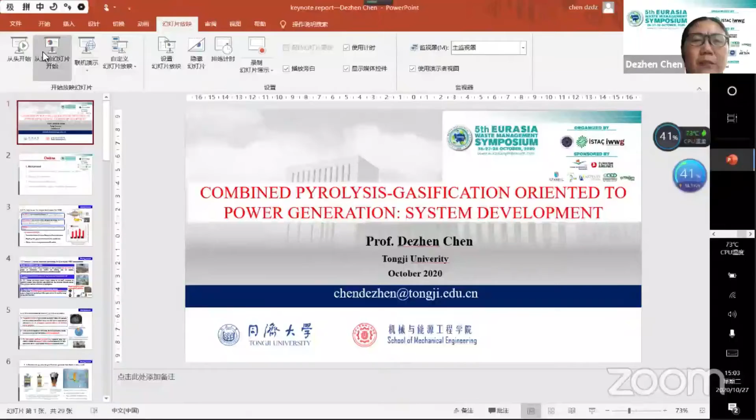My presentation is on combined pyrolysis gasification oriented to power generation system development. I will talk about this from 5 aspects. First, let me give the introduction of the background.

Pyrolysis is an important route for waste-to-energy. Landfill is not a sustainable disposal method. All of China will ban municipal solid waste landfill from 2023. Incineration is a major and widely adopted technology, but with a complicated pollution control system, relatively low power generation efficiency, and high operation cost.

The pyrolysis process works like this: the waste will be heated to a certain temperature without air supply, so the waste will be decomposed into volatile matter and char. When the volatile matter condenses, the pyrolysis oil and gas can be recycled.

It has advantages like this: it has a similar sterilization and volume reduction effect to incineration, and it can also recycle char, gas, and oil instead of only sensible heat like incineration. It is cleaner when the 3 products are safely utilized.

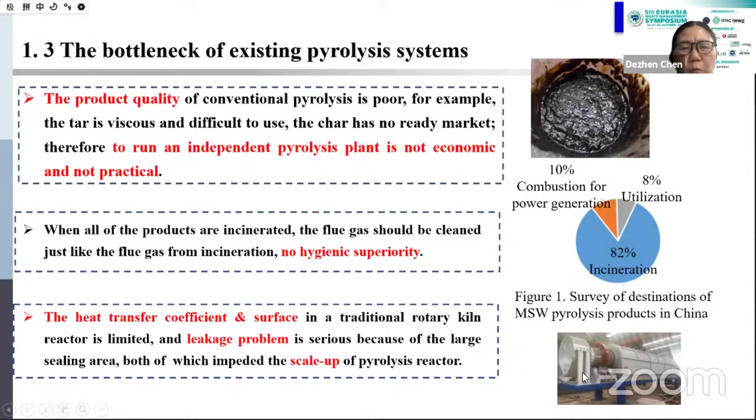We surveyed municipal solid waste pyrolysis plants in China, and found that 82% of the products are just incinerated. When all of the products are incinerated, the flue gas should be cleaned just like flue gas from an incineration plant, so it has no hygienic superiority. Also, for the very common reactor like this rotary kiln, the heat transfer coefficient and heat transfer surface are very limited, and it also has leakage problems. Therefore, scale-up is very difficult.

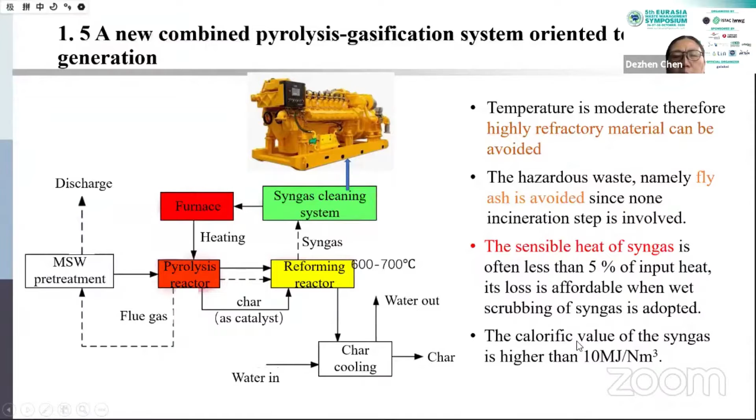We developed the whole system, including this pyrolysis reactor and the reforming reactor, and also the syngas cleaning system, to run more efficiently. We will talk about these three.

First, we want to talk about the pyrolysis volatile reforming mechanism and its effect. For a normal pyrolysis reactor, the volatile will be evaporated from the solid waste, and the volatile will never contact the solid again. But we can force the volatile to contact the hot char again, and then the oil in the volatile will be converted into gas.

So when the temperature increases, the syngas yield increases, and correspondingly the liquid yield decreases. At the same time, the viscous pyrolysis oil with very dispersed components can be converted into refined oil with very low viscosity.

It's more important that we found that in this process, around 80% of the water vapor in the volatile participates in this oil decomposition reaction, and the water vapor is converted into syngas. Therefore, the latent heat of the water vapor is recovered.

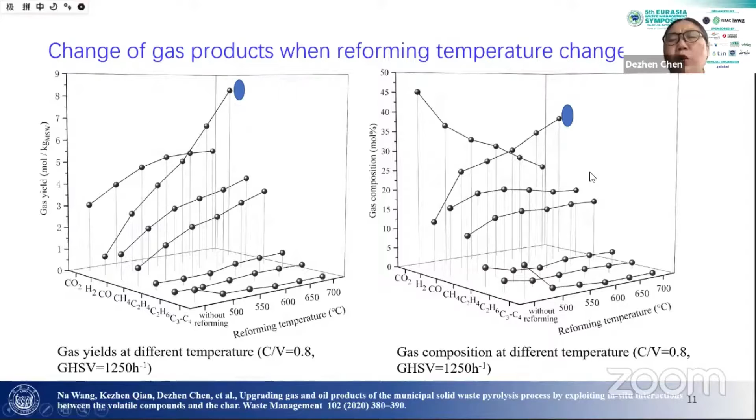Then we talk about reactor development. We must note that pyrolysis is an endothermic process.

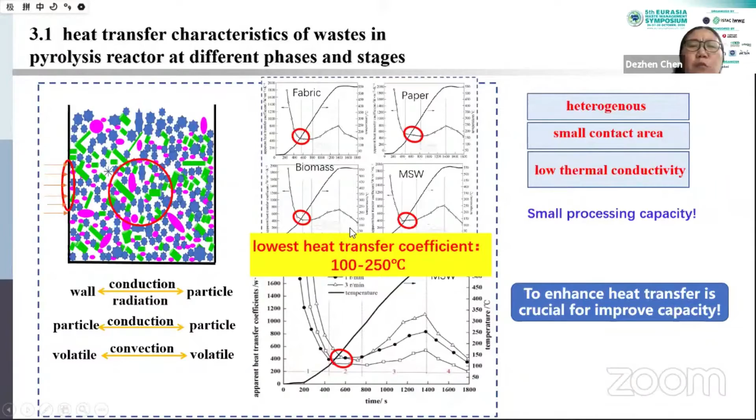Here are the heat transfer coefficient changes inside a rotary reactor for different kinds of waste components. We can say there is a lowest heat transfer coefficient area for all of the waste, within this temperature range. This is just after drying and before the pyrolysis reaction takes place. So actually, it's very difficult to enhance heat transfer in this area for the conventional reactor.

To improve this, we developed a new concept for reactor design. We divided the reactor into two stages. For the first stage, we use this stage to homogenize the heterogeneous waste into uniform particles. In this first stage, we will use combined direct heating and indirect heating together, and then raise the heat transfer coefficient.

But if we consider the breaking force of the paper and the cotton, we find around this temperature, the mechanical strength, namely the breaking force for cotton or paper, decreases to zero. So if we raise the temperature of the waste to this range, all of this material can be easily converted into uniform particles.

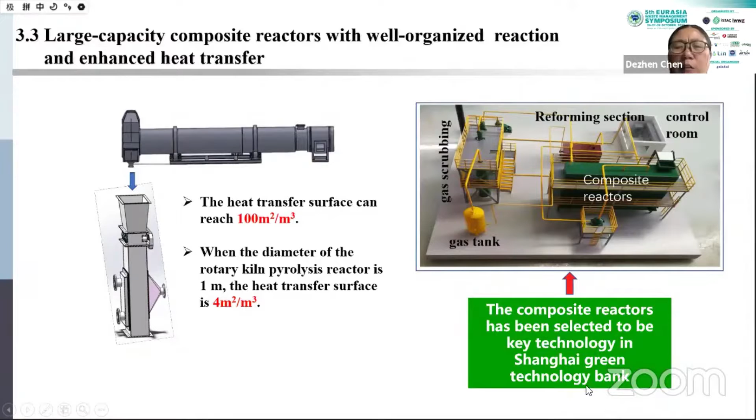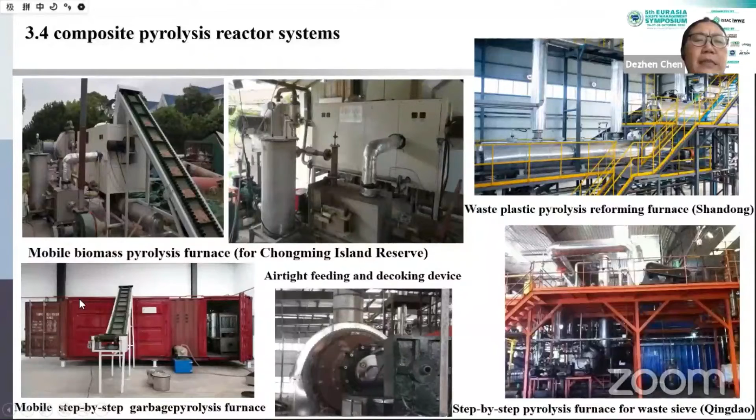We also have developed many reforming reactors for different kinds of materials. These are some examples of the composite pyrolysis reactor systems we have developed. These are movable reactors, and these are big ones. We have a very small, fast moving one for this. This is our pilot testing system, and after this is the composite reactor. It's very small but has a big capacity.

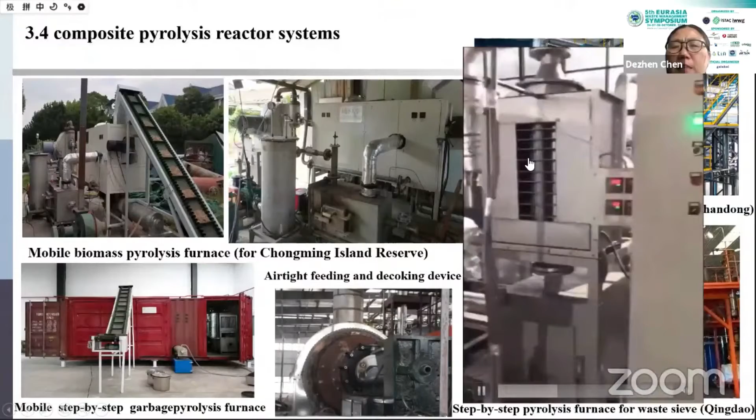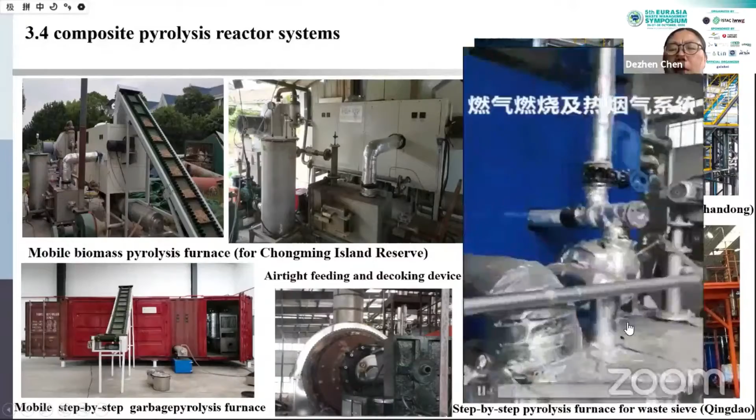Then we have the cyclone for the Syngas scrubbing system. This is the Syngas scrubber, this is the PLC control system, and this is the tower. Also, we have a DCS system. This is the condenser to separate oil and gas, and this is the gas tank. This is the furnace for the Syngas to supply heat for the whole system. You can see the gas burning here. All the gas is produced for our own system.

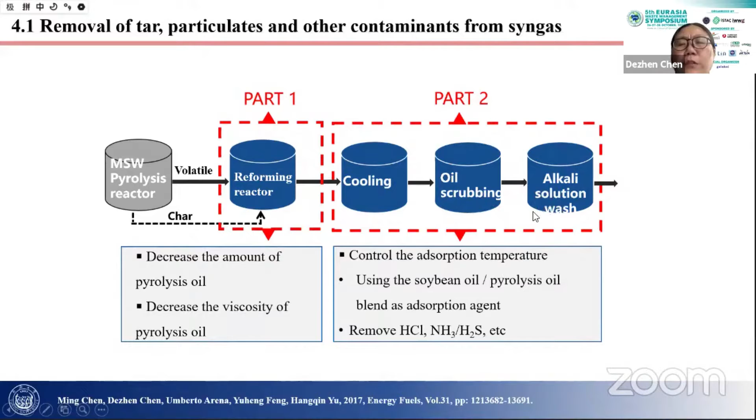Now we talk about Syngas purification. We have developed a system like this for removal of tar, particulates, and other contaminants from the Syngas. It includes a cooling system, which includes the condenser and a water cooling recycling system, the oil scrubber, and the alkaline solution washing tower.

We also tried to use the pyrolysis oil from our own system to replace the soybean oil. We compared this reformed pyrolysis oil with the soybean oil, and we found that when the absorption temperature increased, the absorption efficiency decreased obviously, but the soybean oil changed very little. So the reformed pyrolysis oil is not as good as soybean oil.

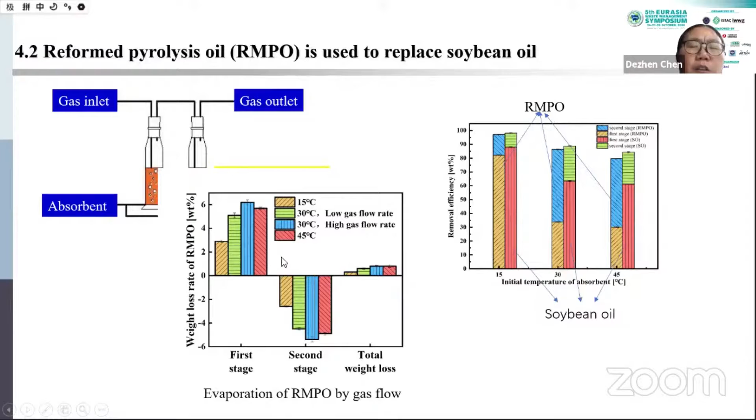We also checked the reason, and we found that the reformed oil is very easily carried by the Syngas. Here are weight loss rates to represent how much reformed oil can be carried by the flue gas. The higher the value, the more oil is carried by the gas, by the Syngas. You can see higher temperature and higher flow rate will take more oil from the absorber.

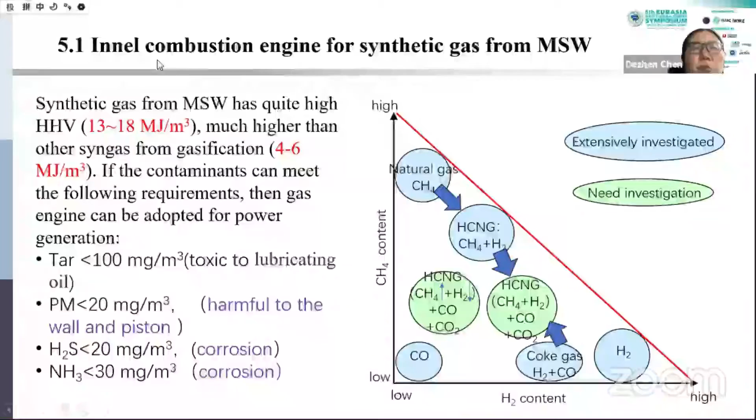Some investigations show that for the internal combustion gas engine, maybe we must change the spark plug area. For example, we may need a pre-combustion room here with some easily flammable gas, for example, hydrogen. But this investigation is still ongoing. We need much effort for this.

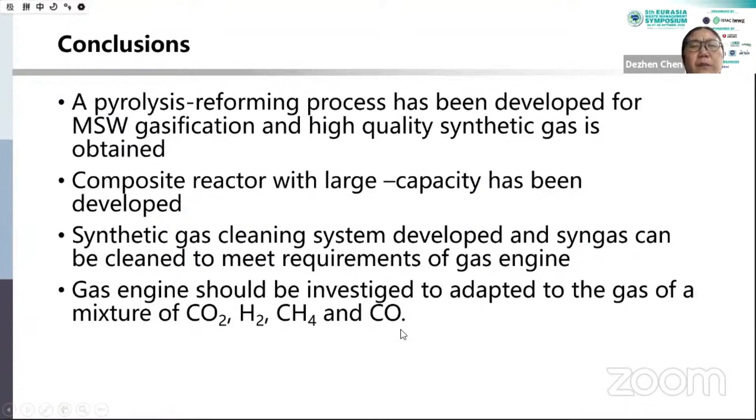So the conclusion: we have developed a pyrolysis reforming process for municipal solid waste gasification, and high quality syngas is obtained. We have also developed a composite reactor with large capacity, and a syngas cleaning system, and the syngas can be cleaned to meet the requirements for a gas engine. And the gas engine should be investigated to adapt to a gas mixture of carbon dioxide, hydrogen, methane, and carbon monoxide. So thank you, and your questions are welcome.

So any question for me? I wonder if the voice is okay. So any question? Okay, if no question, we will move to the next speaker.

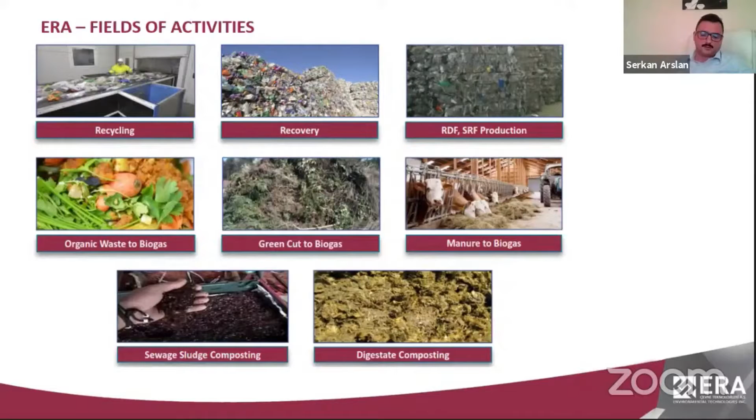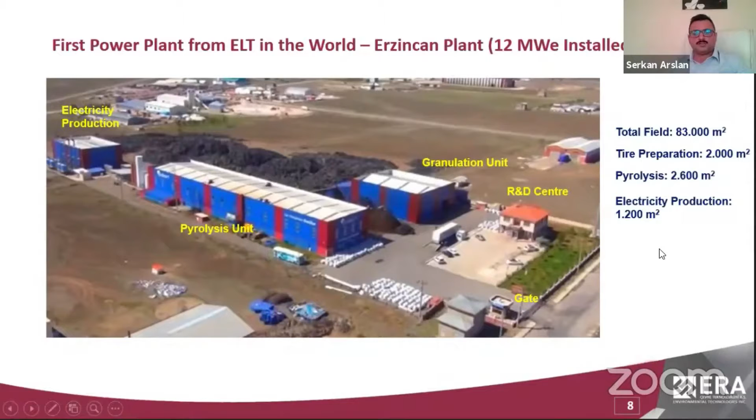You see here the total field is 83,000 square meters. The tire preparation and granulation unit is 2,000 square meters. The pyrolysis unit is 2,600 square meters, and the electricity production area is 1,200 square meters.

We established our official R&D center on 9th April 2019. It is the only R&D center in the field of chemistry in Erzincan. We have closed a TÜBİTAK research and development project successfully. One TÜBİTAK 1501 project is already continuing. And we also have 5 internal projects. We have 10 national publications, 1 now submitted, and 3 published international publications. 3 university cooperations, 1 industry cooperation. A pyrolytic oil and carbon black laboratory. And we have an innovative project, Teknohamle, with a 10 million Turkish lira R&D budget. It is about supercritical water oxidation.

So if we summarize our innovation potential: the first medical waste sterilization plant in Turkey, the first electricity production plant from end-of-life tires in the world, a fully integrated waste management plant, a self-designed continuous tire pyrolysis reactor and line, and the only R&D center in the field of chemistry in Erzincan.

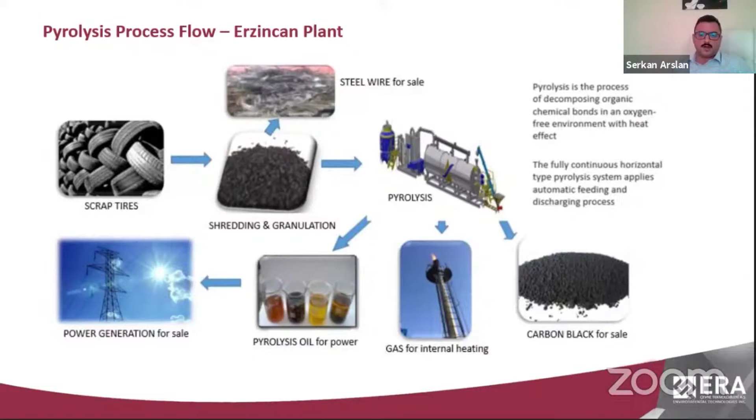Then after the cleaning processes of pyrolysis oil, we send it to the generator for electricity production. The water content of the oil is very, very important. If the water content is over 1000 ppm, we can have some problems with the generator parts. Then we also have carbon black, the char of the pyrolysis process, and this carbon black is sold to rubber and tire producers as binding material.

So I can pass this slide fast because I have already talked about it. You see here some pictures from our plant. Here are the steel wires that we remove from the ELTs.

Sorry, please mind the time. Sorry. Yeah, 2 minutes. Sorry, I didn't understand. Again, please. I mean, only 1 minute. Well, okay. Yeah. Okay.

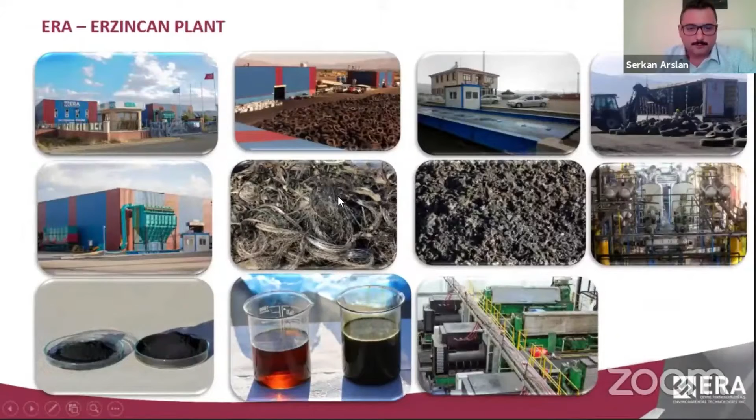Then products and application fields. From the granulate we can achieve 43 to 47% pyrolysis oil, which produces electricity by fuel oil generators. And we have syngas that we cannot condense to pyrolysis oil, that we use to heat the reactor again. We have carbon black, and also, as I said, we have syngas.

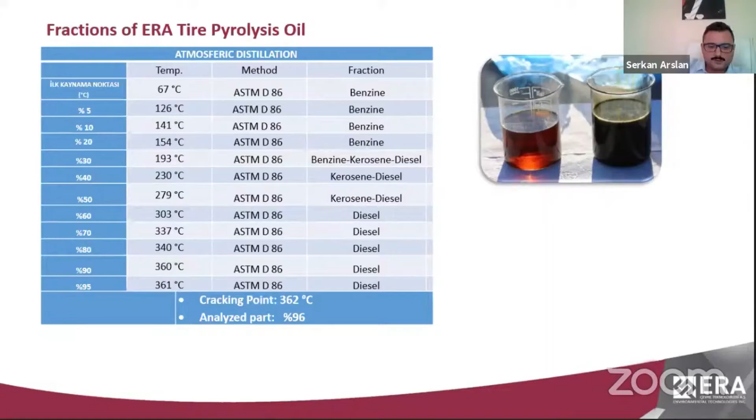The carbon black is one of the most important outputs of the plant. We get it as powder, and we make it smaller to get a smaller particle size distribution, and we sell it to the tire industry, conveyor belt making, rubber industry, paint industry, auto parts industry, and bitumen addition. And we also have a patent application for an earthing resistance reducer.

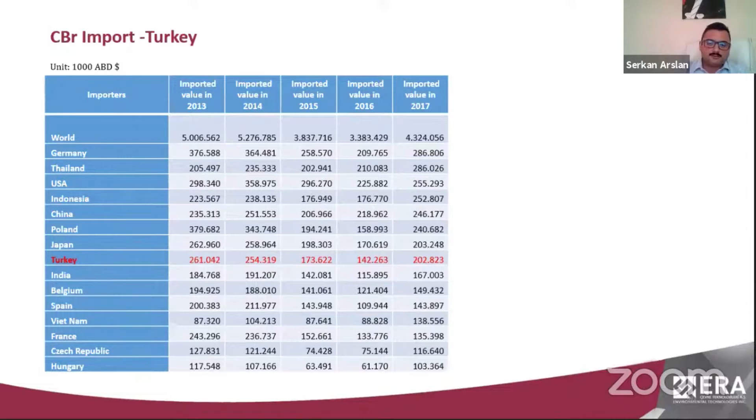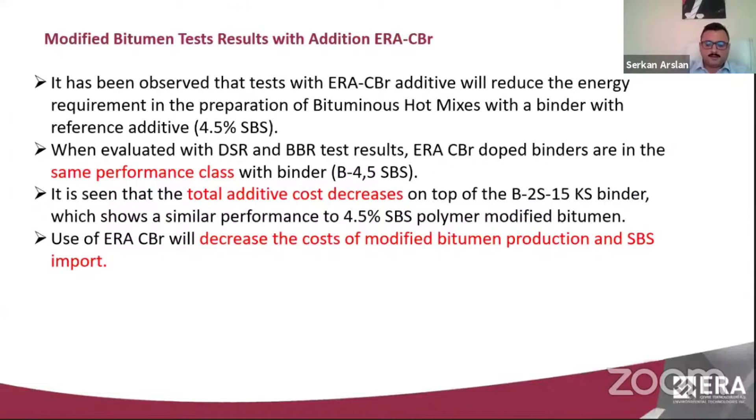So we have another research study. We tried our CBR carbon black in modified bitumen production, and we see that ERA CBR can be used as a modification additive for bitumen, and that will decrease the cost of modified bitumen production and the SBS import, which is used in bitumen production.

which has the value of nearly 5 million euro per year, and carbon black is 152,000 tons, and the value is almost 45 million euro per year, and the electricity production capacity is 800,000 megawatt hours per year.

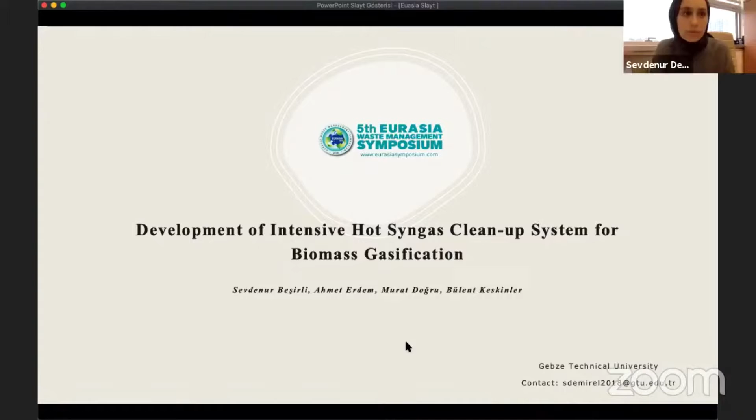No movement. Now, wait a minute. Oh yeah. You can see? Yes. Okay.

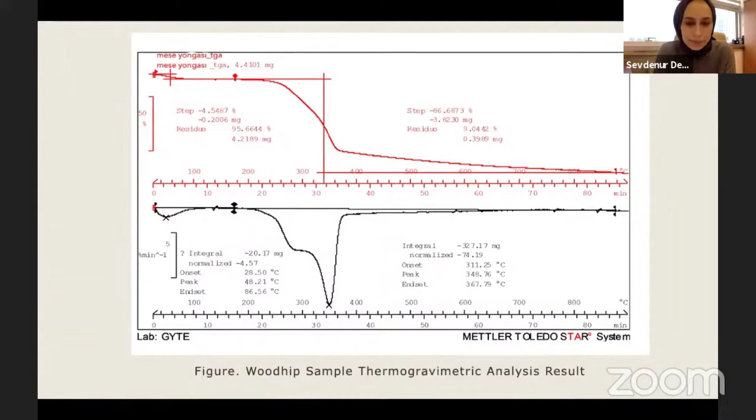In addition, a thermocouple and a control panel are connected to the system to control the temperature level of the resistance. This system was placed at the end of the reactor. Stainless steel filters were used to remove particulate matter, and nickel-based catalyst was preferred for tar removal.

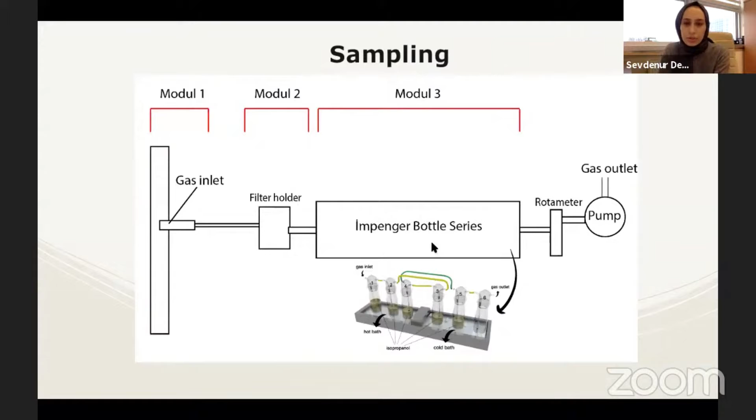To determine the pollutant load of the gasifier reactor, firstly module 1, module 2, and module 3 were all placed in series one after the other as shown in the figure. As a second step, an integrated filter system was implemented between module 1 and module 2 in order to investigate the effect and efficiency of the stainless steel filter and catalyst in syngas cleaning. Rotameter and pump are placed at the end of the impinger bottles for the adjustment and control of the gas flow rate.

The reactor was operated with a feed rate of 100 kg per hour. Sampling was started after syngas was produced, and sampling time was nearly half an hour. A fuel filter was placed in the filter holder shown in figure 2, this place. And then the filter was extracted with isopropanol by Soxhlet extraction in the laboratory. Thus particulate matter and tar were separated, and the amount of particulate matter in the gas was calculated.

And then a 100 milliliter sample was taken from the total tar sample in isopropanol from the impinger bottles, connection pipes, and Soxhlet extraction, and placed in a rotary evaporator. The amount of tar was calculated by separating isopropanol and tar from each other. In order to see the experiment steps in detail, you can check the tar protocol.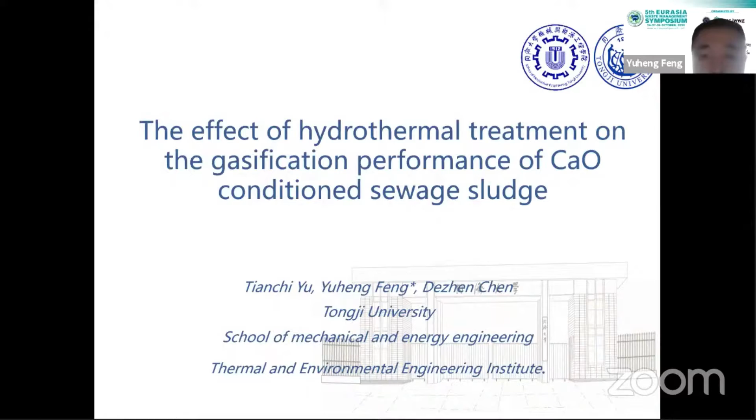First, I will talk about the background. With the faster development of China these days, the sewage output is increasing rapidly from 2011 to 2018, and the sewage treatment capacity has reached almost 60 million cubic meters per year. The sewage sludge, which is the solid production of the sewage treatment process, has also reached over 6 million tons per year, with a growth rate of 10% every year.

For sludge treatment in China these days, we use landfill, incineration, land use, and building materials. Among them, incineration is a very attractive disposal process in big cities, especially in eastern China, since it could eliminate the organic compounds in sewage sludge.

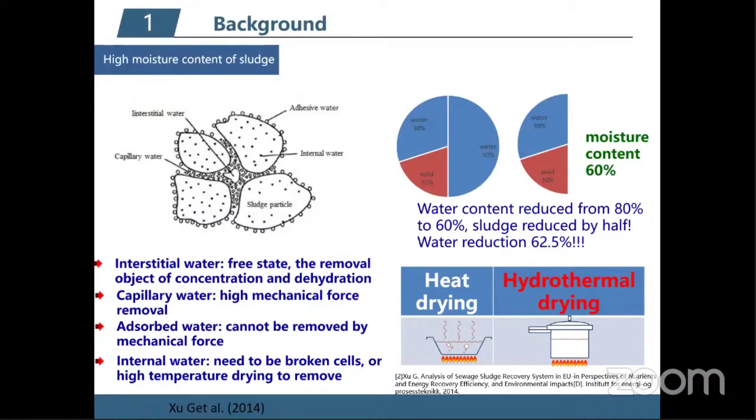For the incineration process, we often use the heat drying process, and its energy cost is very high. Sometimes we use the hydrothermal process in a closed reactor, raising the temperature so most of the water is in the liquid state. So the cells in the sludge could be destructed and energy could be saved.

After that, if we use the mechanical process, it is very easy for us to reduce the water content to around 60%. Also, the hydrothermal treatment has a promotion effect on the gasification process. In our previous study, we found that the tar content in the gaseous products will be reduced, and also the hydrogen content will be raised.

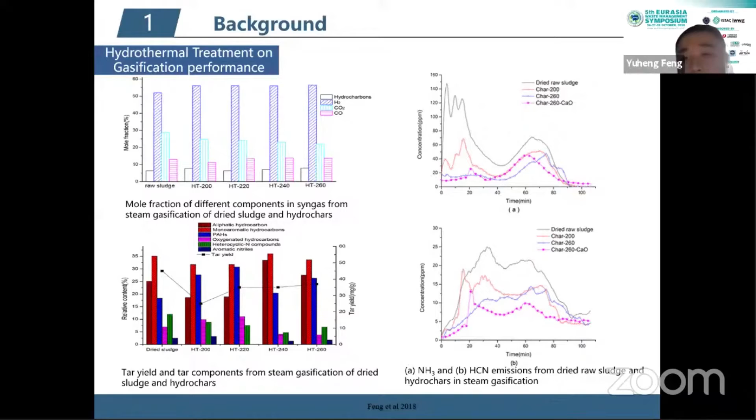Also, some of the pollutants, such as ammonia and hydrogen cyanide, could be reduced by the hydrothermal process.

Sometimes we use calcium oxide as a conditioner for the sewage sludge. First of all, it will reduce the water content since it's an inert material, and heat could be released from the addition of calcium oxide. It will also enhance the mechanical drying performance because it could reduce the viscosity of the sludge. Another reason is for sanitation, because it could kill bacteria and pathogens.

Also, for the gasification process, calcium oxide is a very good catalyst, and it has been proven in the gasification of biomass. So the motivation of this research is to examine the hydrothermal treatment on calcium conditioned sewage sludge.

This is the material from sewage sludge from a sewage treatment plant in Shanghai. It's after mechanical concentration and centrifugal dehydration. The moisture content is around 80%, and its higher heating value is 12.99 megajoules per kilogram.

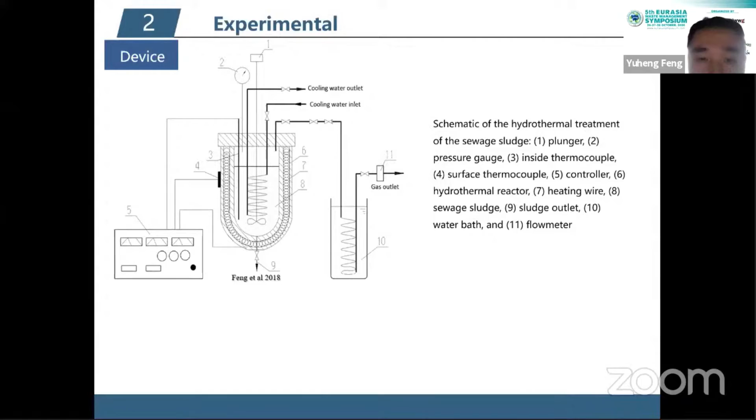This is the hydrothermal device here. We use two temperatures, 200 centigrade and 260 centigrade. The hydrothermal time is half an hour, and the calcium oxide addition is 10% dry base.

This is the gasification device. We used 5 materials: the raw sludge and the hydrochar of the conditioned sludge. We also added the calcium oxide in the dry state, so we named it DM here. And we also added the calcium oxide to the wet sludge, and then we dried it to remove the water, so it's named CS.

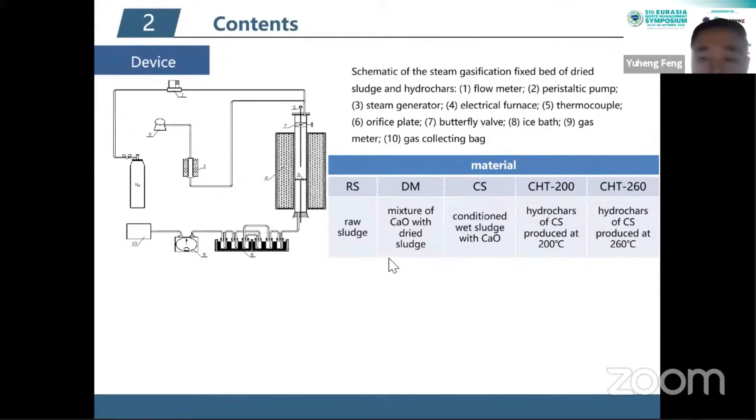And the mass ratio, just to improve the gasification process, to raise the hydrogen content and reduce the tar, we use steam as the agent. The steam to feedstock ratio is 2.4 to 1, and the temperature used here is 900 centigrade.

So these are the products from the hydrothermal process. From the industrial analysis and the element analysis, we could find that the volatiles will be reduced during the hydrothermal process, due to the heating of the material. Also, using the hydrothermal char without calcium oxide addition, we found that the fixed carbon of the hydrochar will be raised, due to the aromatization process during hydrothermal treatment.

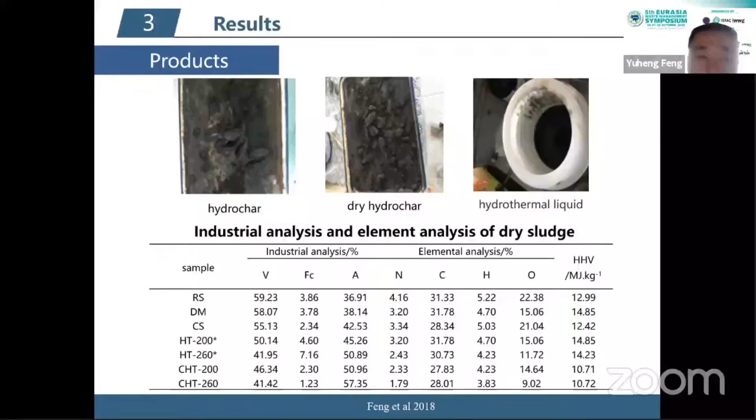But for the hydrochar with calcium oxide addition, we find that fixed carbon is reduced. This is because of test problems, since during the pyrolysis process, some carbon oxide and some steam released will react with the fixed carbons. Also, the heat values will be reduced after hydrothermal treatment, since the addition of calcium oxide will not contribute to the organic compounds in the sludge.

And then this is the FTIR of the materials. We could find that the peak of hydroxide and nitrogen-hydrogen groups will be reduced with the hydrothermal process. This is because of the dehydration and also the destruction of the proteins during the hydrothermal process.

And then these two peaks are the amides. It could also be found that the amides will be reduced by the hydrothermal treatment.

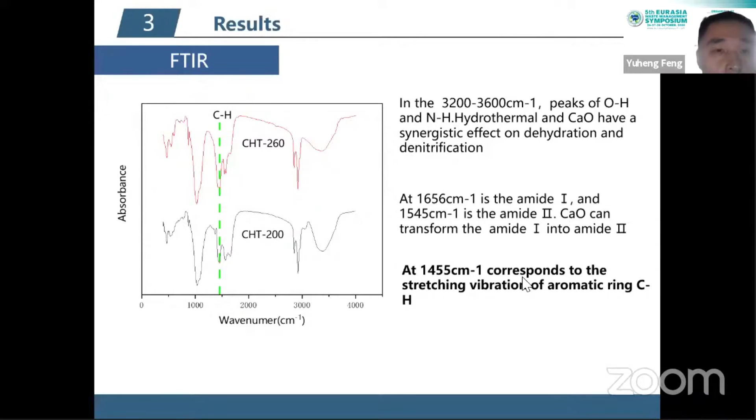And this is the peak of the CH bond in the aromatic rings. We find that when we raise the hydrothermal temperature, the aromatic compounds will increase, so the peak will increase correspondingly.

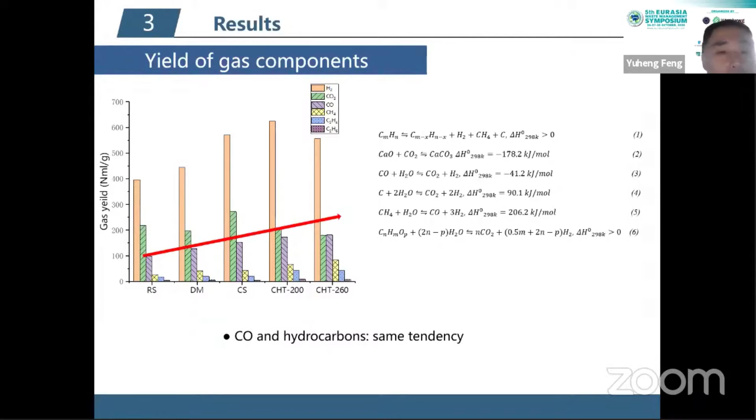Now for the gas yield, we could find that it has the opposite tendency. Gas yield has the same tendency as the hydrogen oxide. This can also be explained the same way as the hydrogen production.

Also, when we check the retention rate of the volatile matter, we find that with the calcium oxide condition, the volatile matter retention will be largely increased by the addition of calcium oxide. This is because of the retention of some fatty acids by the calcium oxide. Also, if we raise the hydrothermal temperature, the retention rate will be reduced. This is also the reason for the gas yield reduction.

And for the high heating value, it has the opposite tendency of the carbon dioxide, because we know that carbon dioxide will not be helpful for the heating value of the gaseous compounds.

And for the tar yield, we could find that by the calcium oxide addition, the tar content will be decreased from 4.5%. For the CHT 260, it is reduced to 1.75%. So it is largely reduced by the calcium oxide addition and also by the hydrothermal treatment.

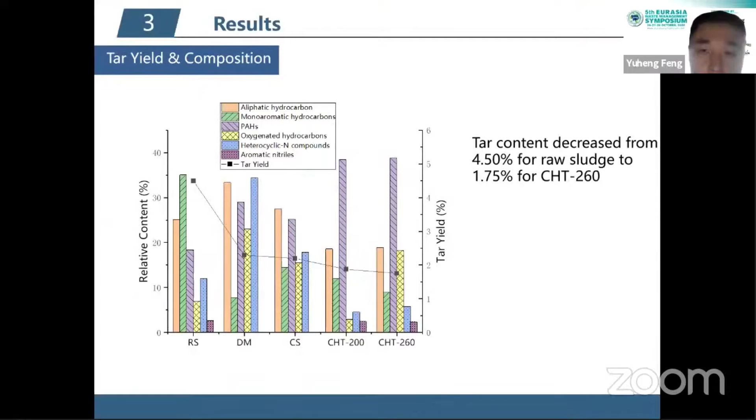Okay, one question. What's the most suitable amount of calcium oxide that should be added to the sludge hydrothermal process?

I think in this research, we did not change the ratio of calcium oxide, but in some other studies, we adjusted the calcium oxide addition. I think it will depend on economic reasons, because when we add calcium oxide into the sludge, the heating value will be reduced. Above all, we found that 10% will be better than 20%, since it's a compromise of the gas yield and the heating value. So I think 10% is better according to our research here.

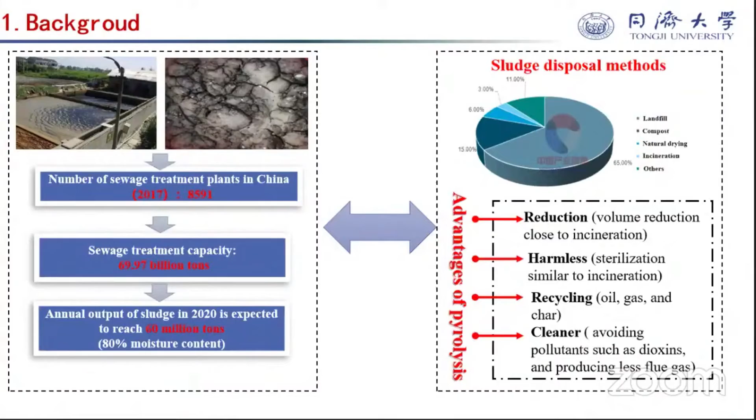And the choice of pyrolyzer plays an important role in the pyrolysis technology. The reported waste pyrolyzers include fixed bed reactor, rotary kiln, fluidized reactor, and tube reactor. Of all these reactors, they have more or less problems such as low heat transfer efficiency, difficulty to seal, and high power consumption.

Considering the characteristics of the sludge, we propose a new type of pyrolyzer, namely a vertical falling reactor, where the sludge falls by itself under the action of gravity, so it consumes less power and is very easy to seal, and the heat transfer surface can be arranged flexibly to improve heat transfer performance.

High temperature flue gas is induced from the top of the reactor to heat the sewage sludge directly, and the high temperature flue gas can promote the tar to crack. Besides, the vapor has an important influence on the char. Learning about the heat transfer characteristics is very necessary for the design of the reactor, and numerical simulation is an effective method.

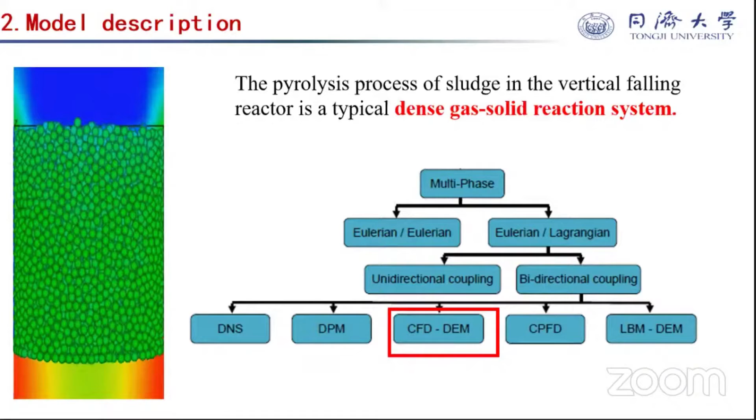The pyrolysis process of sludge in the vertical falling reactor is a typical dense gas-solid reaction system. There are two main numerical simulation methods for dense gas-solid flow: the Euler-Euler and Euler-Lagrange methods. The CFD-DEM method used in this research is a typical Euler-Lagrange method. In the CFD-DEM method, the Euler method is used in the gas phase, and DEM, which is short for discrete element method, is adopted in the particle phase.

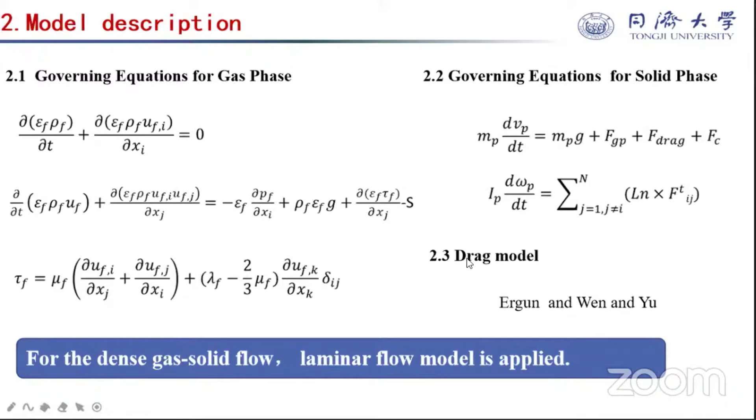In this model, several assumptions are made. For the dense gas-solid flow, the flow type of the gas phase is usually assumed to be laminar. The conservation equations of mass and momentum can be written as follows. The solid phase is solved by the DEM method, and the drag model used in this research is Ergun and Wen-Yu.

As for the heat transfer models, they normally include three parts: convection, conduction, and radiation. In this research, radiation is neglected. In the particle shrinking model, it is assumed that the density of the particles remains unchanged, and the particle size gradually decreases as the mass decreases. Through the thermogravimetric experiment, the relationship between the particle diameter and the mass lost is fitted.

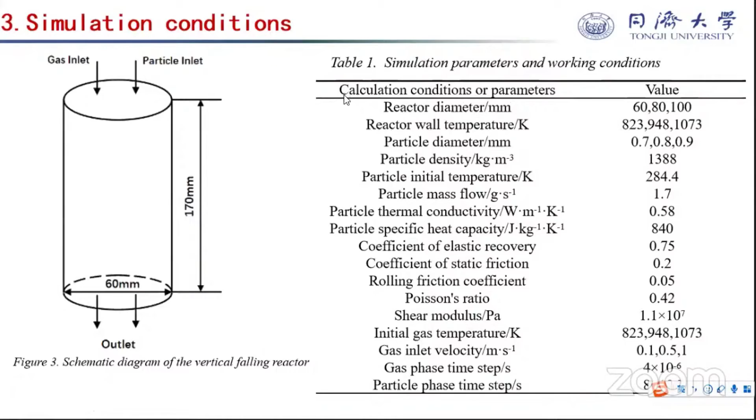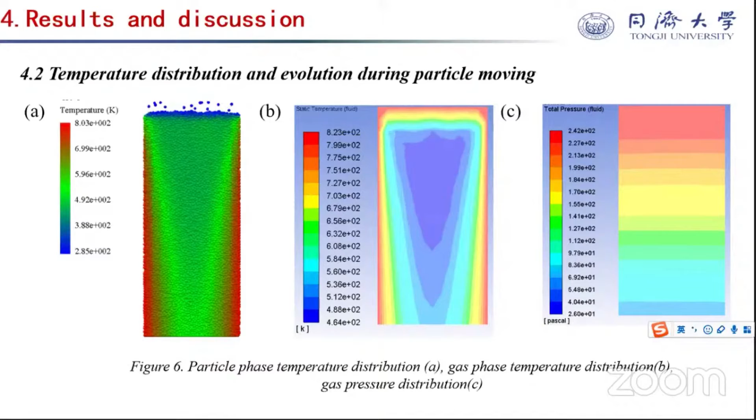The figure on the right demonstrates the pressure change from entering to exiting the reactor. The pressure drop is more than 1,000 pascal per meter, indicating that this type of reactor has a relatively high resistance and should not be designed too long.

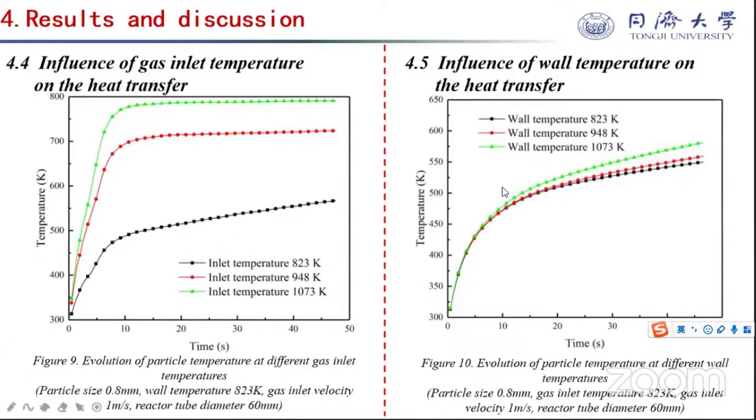The evolution of particle temperature at different wall temperatures is shown in Figure 10. As we can see, in the initial time, the temperature rise speeds are almost the same under different conditions. This is because in the initial time, the temperature difference between the flue gas and the particles is huge. Convection dominates the heat transfer, and as the particles go down, the influence of the wall temperature begins to appear. The reason is similar to that in Figure 8.

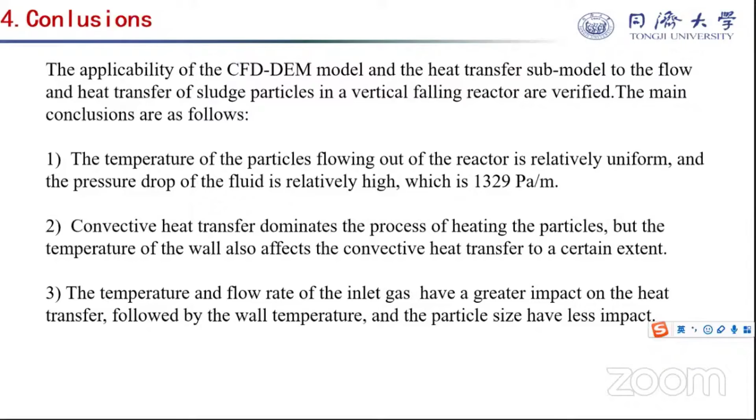which is 1,329 Pascal per meter. Convection heat dominates the process of heating the particles, but the temperature of the wall also affects the convective heat transfer to a certain extent. The temperature and flow rate of the inlet gas have a greater impact on the heat transfer, followed by the wall temperature, and the particle size has less impact.

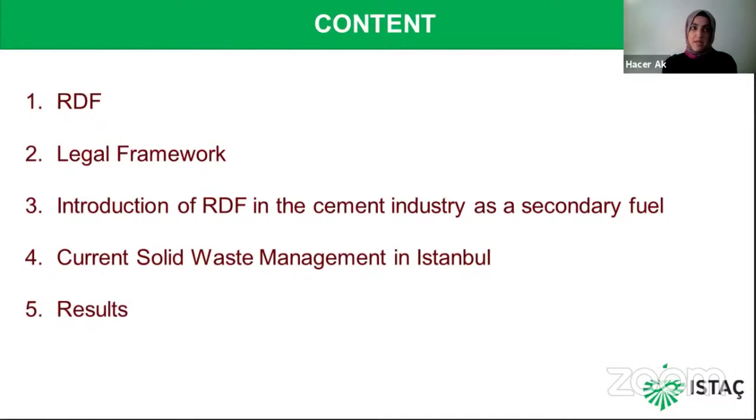The content: I will be giving basic information on RDF. I will be talking a little bit about the legal framework regarding RDF in Turkey, followed by the introduction of RDF in the cement industry as a secondary fuel. I will be mentioning the current waste management in Istanbul and give details on our RDF plant, the analysis that has been conducted, and the results of our study.

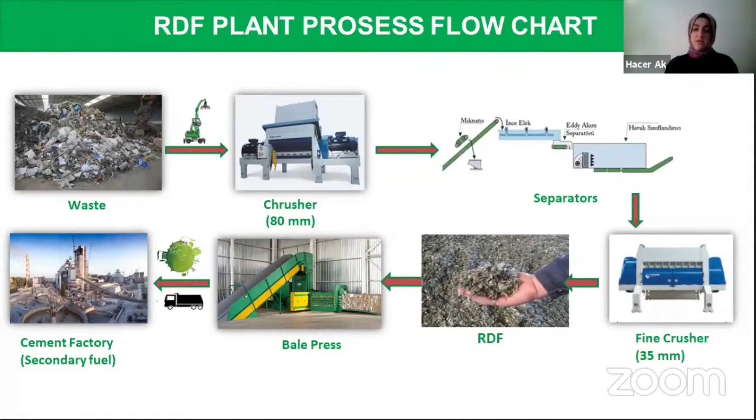RDF is a secondary fuel in the cement industry. Turkey is one of the world's top 10 cement producers, with 55 active integrated cement factories. Normally, cement facilities require fuel to meet the energy for their production. They operate at 1450 degrees Celsius. Thus, the use of fossil fuels to operate is so high. According to the literature, at least 65% of this fuel can be compensated through alternative fuels.

When the legal framework on the use of RDF as a secondary fuel in Turkey is investigated, it can be noticed that the production of RDF did not have a regulation until 2010. The first legislation was published in 2010, where the principles regarding the disposal of wastes in incineration plants and their use as additional fuel in industrial plants are regulated.

Another regulation was published in the official newspaper in 2014. And the last directive was in 2017, which makes it mandatory for facilities that have a higher than 5,000 tons per year waste feed. They are mandatory to use RDF now in Turkey.

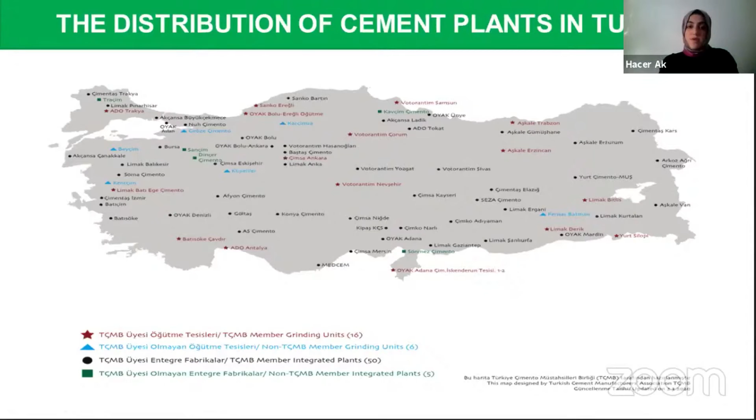To produce 1 ton of cement, the equivalent of 60 to 130 kilograms of fuel and 110 kilowatt hours of electricity is required. So you can imagine to run these many facilities, how many tons of fossil fuels will be needed. According to the Turkish Cement Manufacturers Association's data, 35 of the 55 facilities have licenses to use waste as a secondary fuel.

In order to participate in the circular economy and also to reduce the cost of fossil fuel consumption, the technique of co-processing had been employed to introduce alternative fuels as part of the manufacturing process. Lower cost of production, as well as reduction of environmental liabilities, less carbon footprint, less landfill requirement are achieved by using alternative fuels in the cement industry.

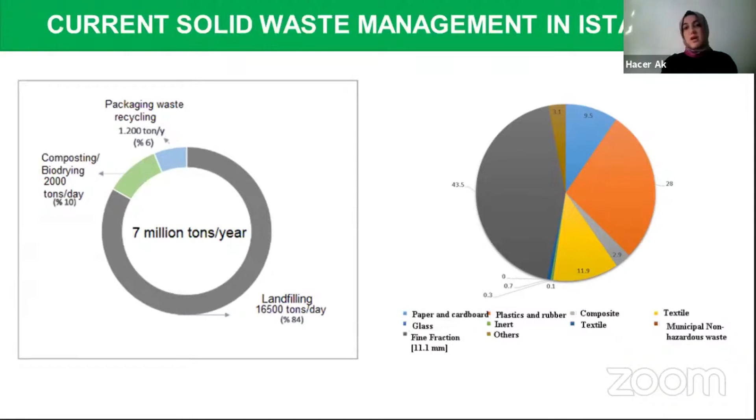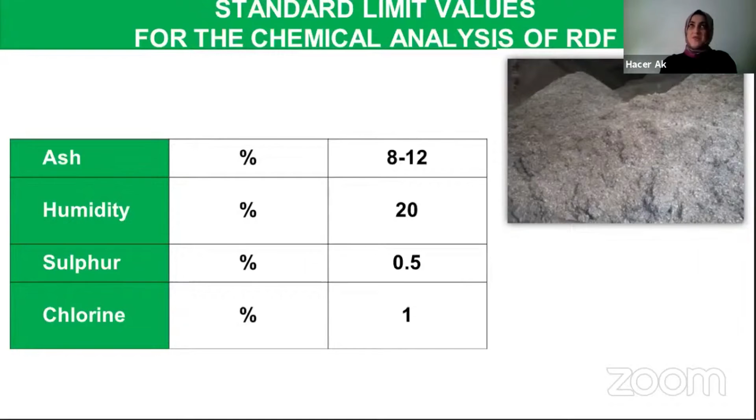We also generated 2 different mixtures to investigate the optimum RDF combination. The raw rubber, paper, textile, and plastic, and 2 batches were sent to the facility for analysis. 10% rubber, 50% textile, 30% paper, and 10% plastics were combined for the first batch, and 40% plastics, 10% paper, 10% textile, and 40% rubber were mixed for the second batch.

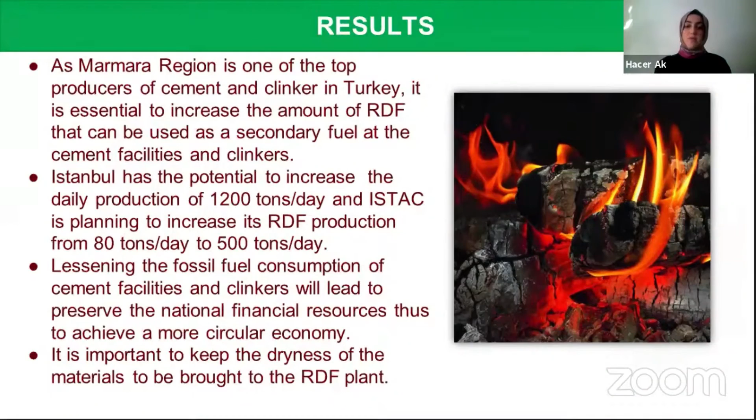Thank you for your presentation. I'm wondering, do you have any standards for your RDF products? Yes, we do. Input standards or output standards? I have shown here. Humidity should be below 20%. Sulfur content should be 0.5%. Chlorine content should be less than 1%. And ash content should be in between 8 to 12%.

So this is the standard for RDF product? Yes. Okay. Only one kind of products? For example, I remember in USA, their RDF can be divided into 7 grades. Then the quality can be different. So for your RDF product, you did the same? We also have different qualities, different types of qualities that we can produce.

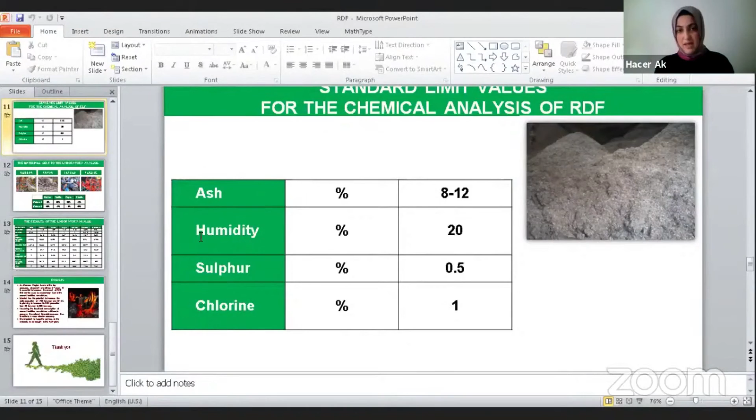Okay, I see. I have a question. Yeah, please. Yeah, please ask your question.

Already written down. But I would like to ask, do we have enough diversion rate for municipal solid waste for Istanbul? It would be better if we collect our municipal solid waste separately. We should have done maybe already. Do you understand what I'm asking? You're asking if it is better to collect wastes from source separately? Yes. That is the ideal.

We should. Perfect. Yes, that would be perfect if the enforcements were more strict. I think we are a little bit late for this. We should have already done this kind of separation a long time ago, maybe. Yes. Okay, just a reminder. I just wanted to remind İstaç to hurry up. Yes, I see. We should hurry up.

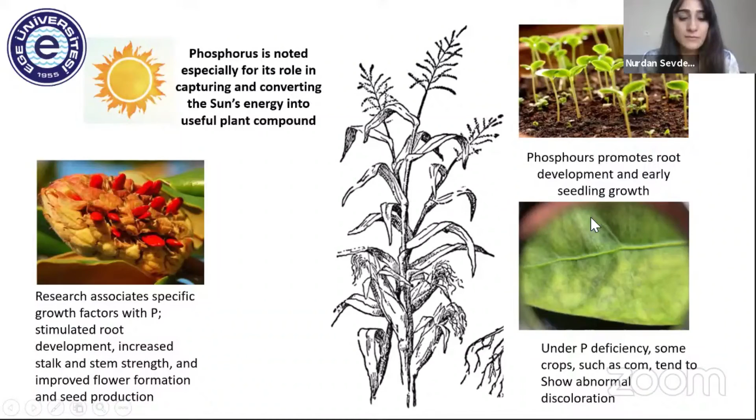So when we come to the problem related to phosphorus, it is limited and non-renewable. Phosphate rocks are the raw material for phosphorus fertilizer. It is clear that these rocks are being exhausted. Besides being a limited source, extraction of phosphorus from these rocks also creates dangerous waste. And removing the impurities requires high energy.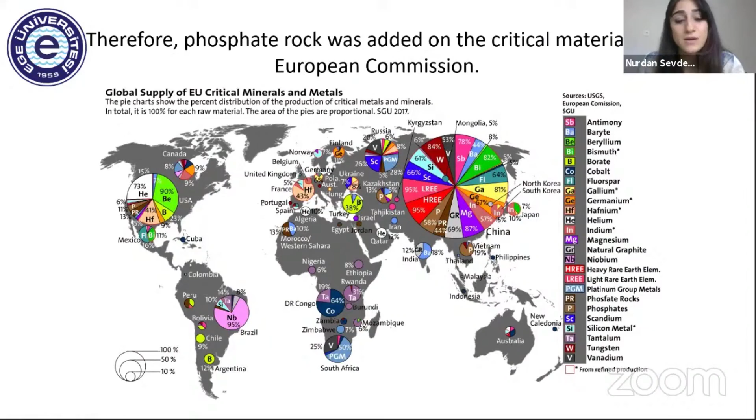So I told you that phosphorus is one of the main nutrients of our plants, and it cannot be replaced with other elements. That is why phosphate rock appears in the critical raw materials list of the European Commission. So it is important to recover it from waste from the economic, sustainability, and environmental points of view.

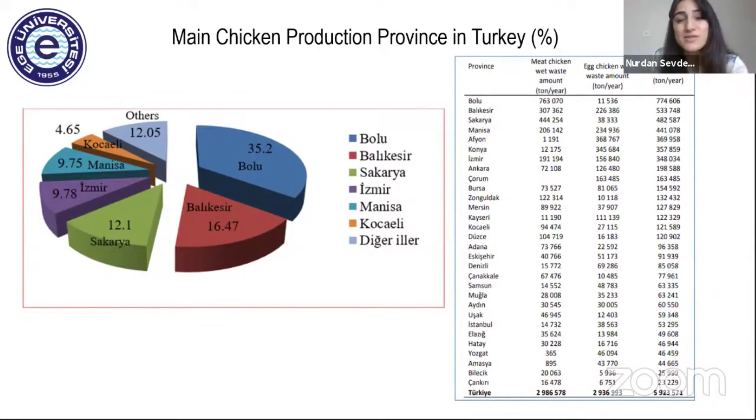Existing technologies such as combustion, anaerobic digestion, gasification, pyrolysis, and hydrothermal conversion may be an alternative way for proper management of these wastes. Our main purpose is to recover phosphorus from poultry litter to be used as mineral fertilizer, and to investigate the total and bioavailable phosphorus content in poultry litter ash from a power plant. In our study, we carried out thermochemical processes, which are hydrothermal carbonization and pyrolysis, and examined the effect of experimental conditions on total and bioavailable phosphorus.

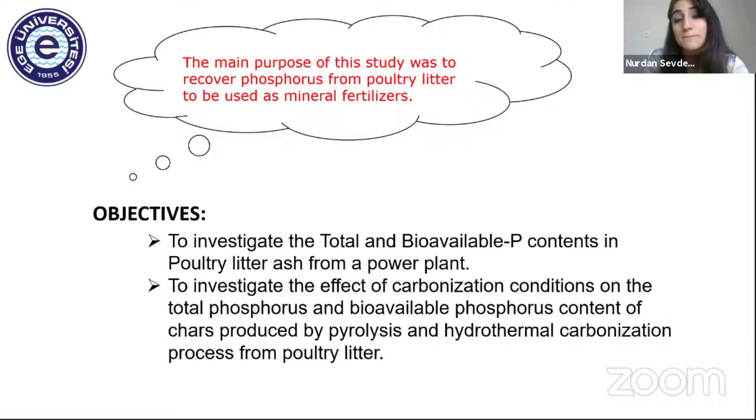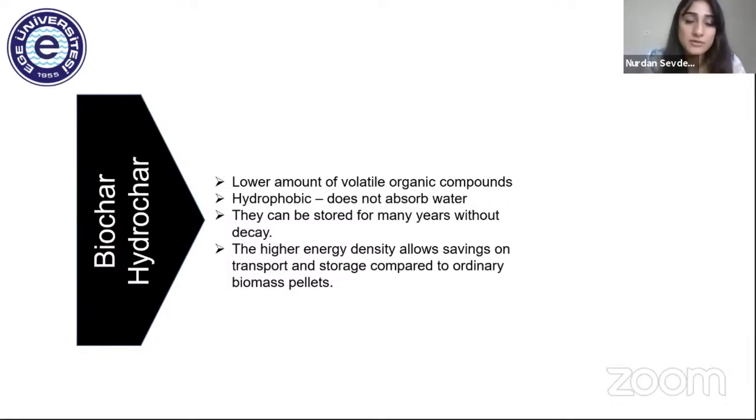I would like to start with hydrothermal carbonization. It is an environmentally friendly and inexpensive process of wet biomass under autogenic pressure and low temperature. This process is also preferred because of its high conversion efficiency and availability of biomass without pre-drying. After hydrothermal carbonization, we have three products, which are gas, liquid, and solid, which is named hydrochar. We carried out our experiment in a stainless steel autoclave at 3 different temperatures and 2 different reaction times.

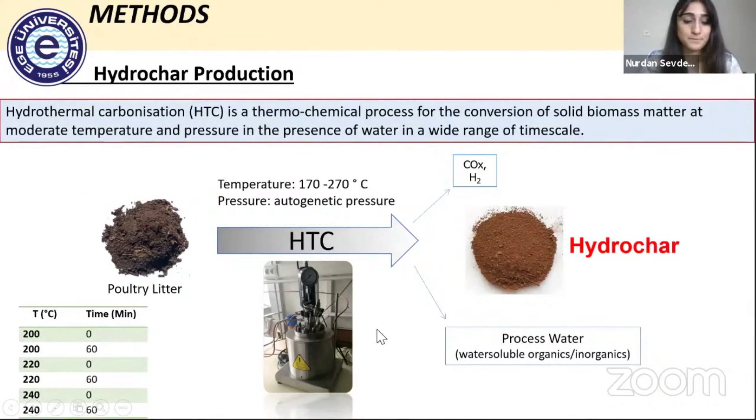In terms of analysis, we determined the total phosphorus by ICP, available phosphorus by the Olsen method, and inorganic contents by XRF. For the surface morphology, we made XRD, SEM, and EDS analyses.

So when we come to results, here we have the yields of chars. As expected, with increasing temperature, the biochar yields decreased. The reason is that the biomass decomposes more at high temperature compared to low temperature. We can say the same thing for the hydrochars, but there are still no significant changes.

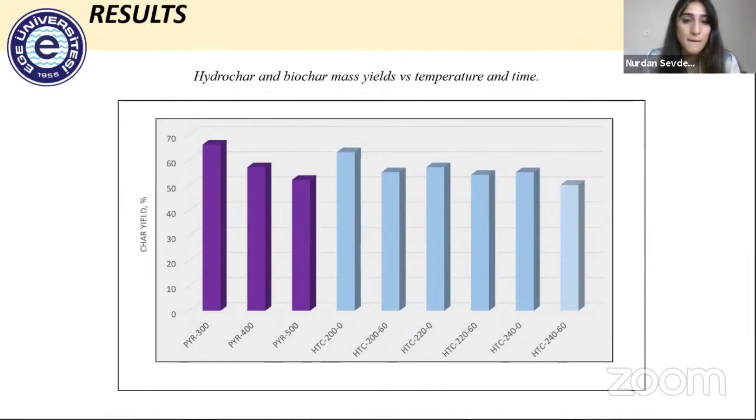And also we compare the total phosphor, calcium, and soil available content of poultry litter ash and chars. I would like to explain soil available phosphor in short. It defines the phosphor that can be easily taken by plants, and it is more important than the total amount of phosphorus. As seen, poultry litter ash has the highest phosphorus content, but it has the lowest available phosphor.

When we compare the total phosphor amount of biochars, it is clearly seen that during pyrolysis, phosphor remains mostly in biochars. Available phosphor decreased above 400 degrees, probably due to the formation of insoluble phosphate salts like calcium phosphate. In hydrothermal carbonization, hydrochars also have a considerable amount of total phosphorus.

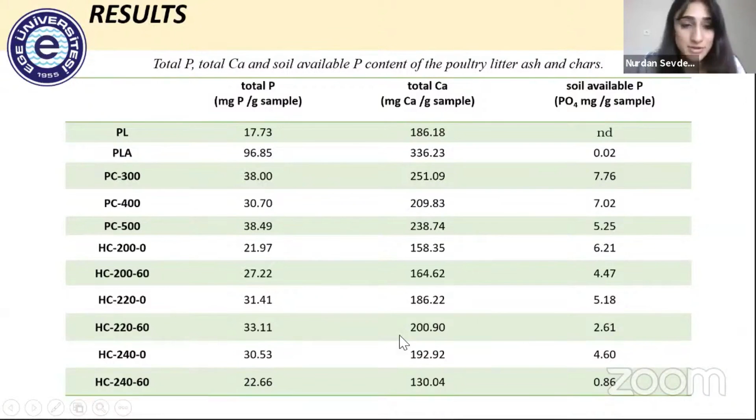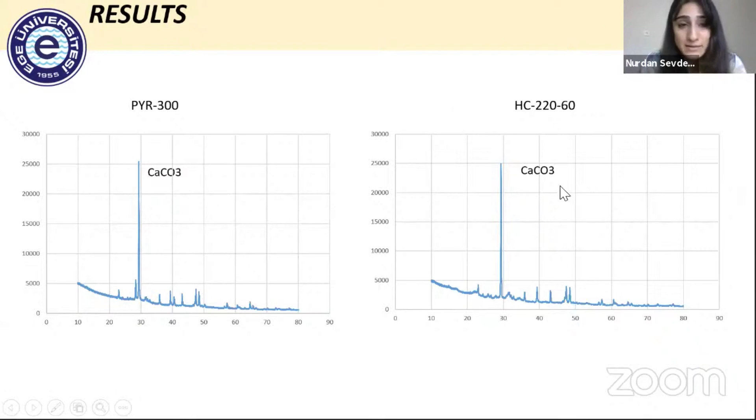So in conclusion, hydrothermal carbonization yielded a higher energy densification than pyrolysis, but both processes produced chars having a low calorific value compared to the biomasses due to their high ash content. On the other hand, results show that a large amount of phosphorus from the feedstock was retained in the biochars and hydrochars. So it was concluded that the biochars and hydrochars derived from poultry litter can be used as soil amendment rich in phosphorus.

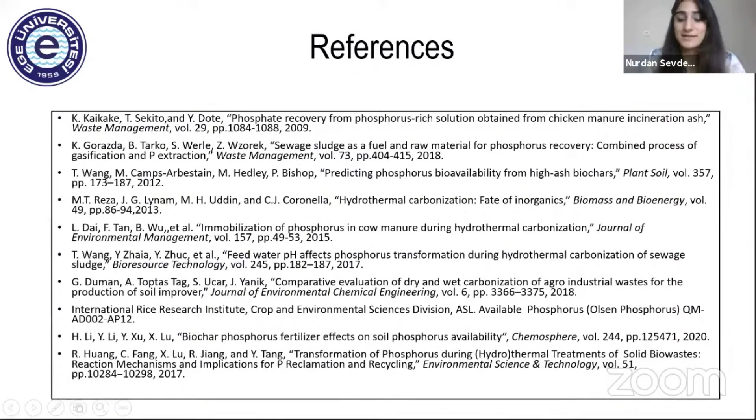Thank you for your presentation. I see a question for you already, in the chat area. I cannot open it, but I see it. I think the person asking the question can speak a lot.

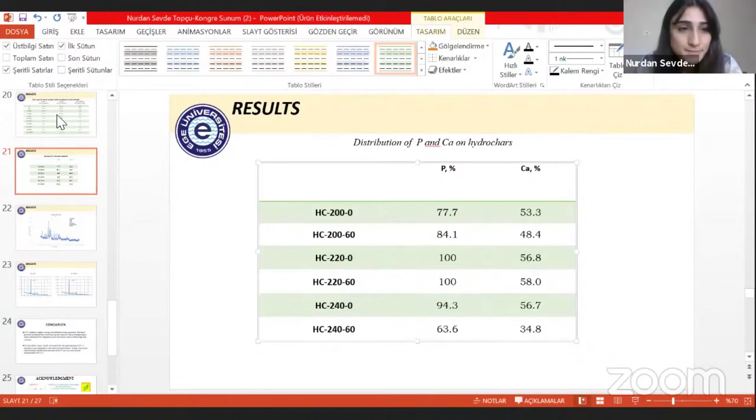Why does the increase of duration time reduce phosphor availability? With increasing time, I think the phosphor remains on the chars, that's why the decrease of phosphate. I think because the phosphorus remains on the hydrochar, that is why. Another answer given in chat is that it causes an increase in solubility.

Do you recommend hydrochar or biochar from pyrolysis for soil available phosphorus utilization? Which one is better? We can look at this here again. So biochar will be better for soil available phosphorus.